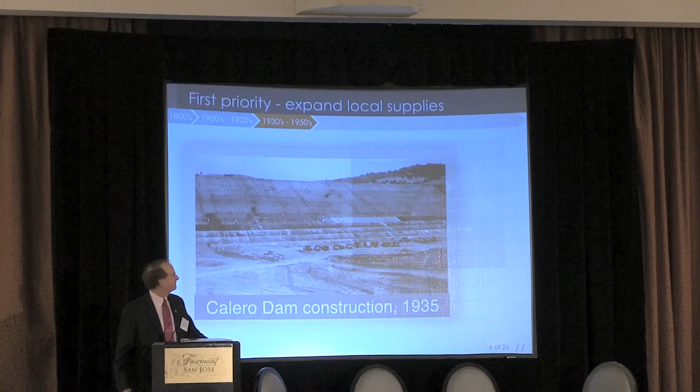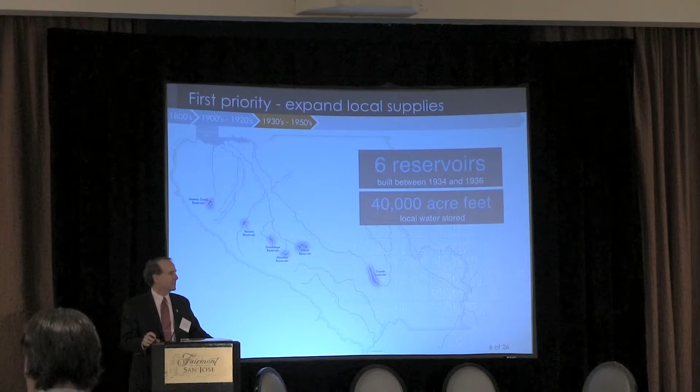In 1935, construction of Calero Dam and the Calero outlet began. In a short period of time, which we cannot replicate today, about 2 or 3 years, 6 dams were constructed in Santa Clara County, from Stevens Creek in the north to Coyote Reservoir in the south. These reservoirs combined allowed us to store water to replenish the groundwater basin, about 40,000 acre feet.

The important news is that those facilities built in the 1930s are still in use today, provided we get rainfall, allowing us to continue to manage the water supply for Santa Clara County. Additional reservoirs were built in the 1950s, Anderson and Lexington. But what became apparent was that the local supplies in our county could not meet the needs for water.

What you see illustrated there is a commercial, an advertisement by the San Jose Chamber of Commerce in 1946. It could have been at a function at the Fairmont, for all I know, where they were touting this important region, Santa Clara County.

The poster read, 'I see a market of 40 million people with Santa Clara County as the hub.' Now, 40 million wasn't going to be the population of Santa Clara County, it was the whole west coast of the United States. But the realization was, given the features of Santa Clara County, this could be the hub for commerce. What visionaries they really were, because today Santa Clara County is the hub not only for the west coast, but the United States in terms of high-tech and innovation.

That also illustrates the growth of the population in our region. We went from an agricultural area with orchards to a thriving manufacturing region. You see what happened in the ensuing time, the population growth from the 1940s, believe it or not, the population of Santa Clara County was under 200,000. Imagine what it was like then, and then you see the burgeoning growth that occurred post-World War II boom, and the need for continuing to manage our supplies.

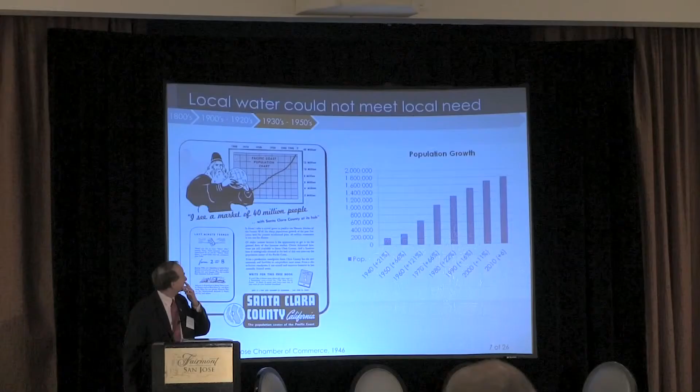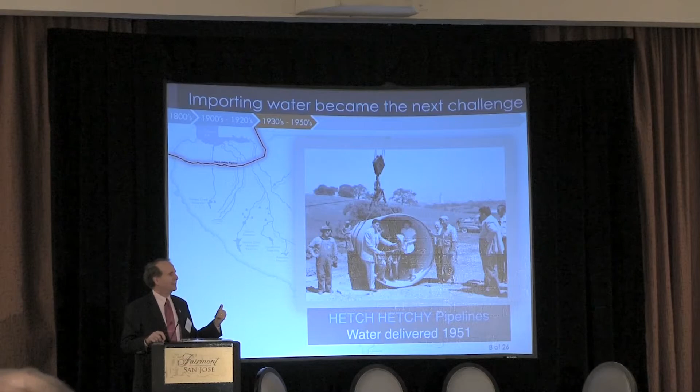What was the solution at that time? This photo shows the need to bring imported water, generated outside our region, into Santa Clara County. The first such source of imported water was the Hetch-Hetchy system from the City and County of San Francisco. Here you see a photo of the construction that was occurring. No, they weren't going to bring cattle through the pipeline, they were actually going to bring water. You can see in the background Hoover Tower in Palo Alto. This was the first delivery of imported water into Santa Clara County, started in the 1950s.

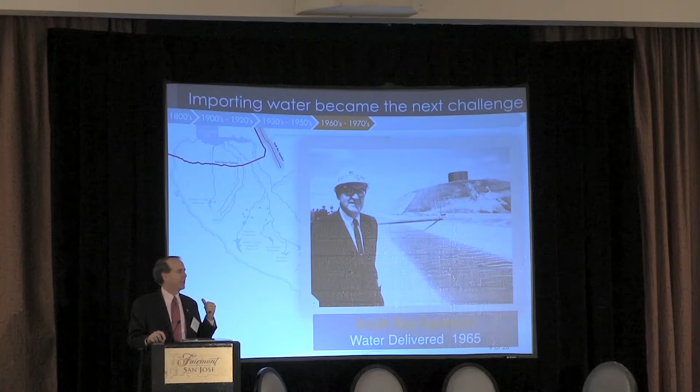Fast forwarding to '65, you see the then-governor, who's the current governor's father, touting the State Water Project, and in 1965 the State Water Project began deliveries into Santa Clara County. What's shown on the slide on the left is the outline of Santa Clara County with the lines depicted: the red line is the Hetch-Hetchy system, and the orange line is the State Water Project entering Santa Clara County in the northern part of our region.

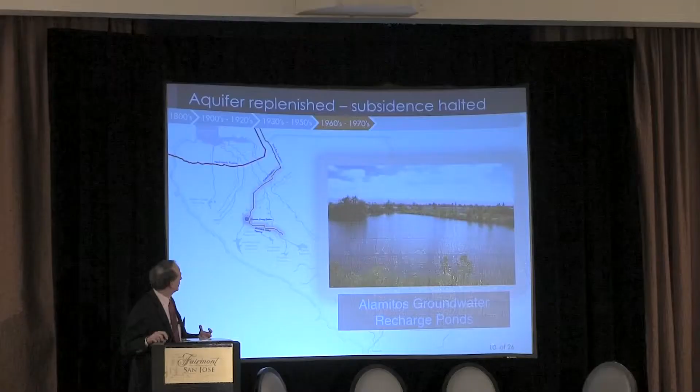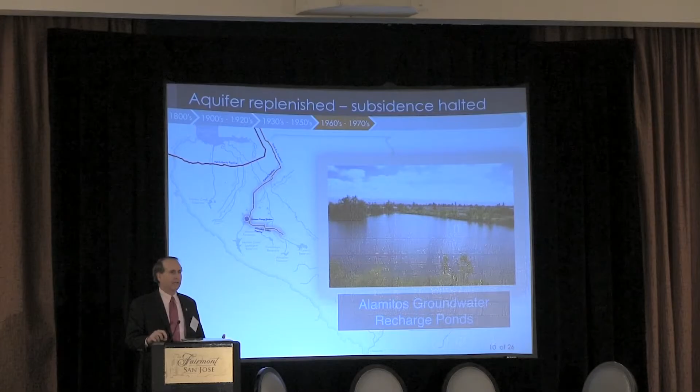An in-county distribution system was starting to be constructed to move that state water through the county. What you see depicted is our central pipeline, which passes not too far from here, bringing state water across the valley floor and over to the west side of Santa Clara County. An important result of bringing imported water was not only providing for water supply, but halting the subsidence that I mentioned earlier, which occurred throughout our region.

We were able to bring in imported water to supplement our local supplies to recharge our groundwater. We also recognized that just recharging our groundwater was not sufficient.

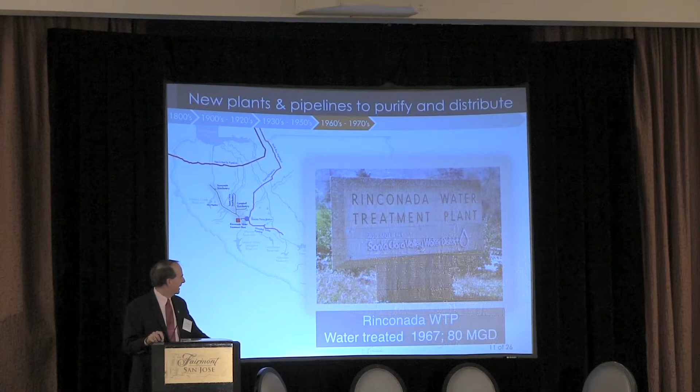We need to allow our customers to rely on surface deliveries of imported water. So we constructed our first large water treatment plant, completed in 1967, that would take imported water, and instead of people pumping from the groundwater, they would take water from our surface treatment plant. This had an 80 million gallon a day capacity.

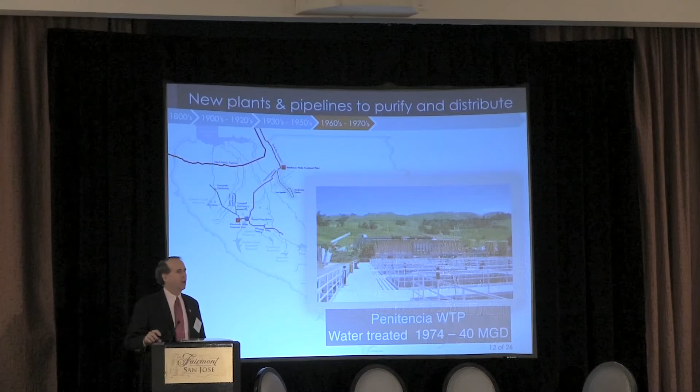In 1974, we constructed our second water treatment plant, Penitencia, on the east side of Santa Clara County, located at the top on that slide. Again, supplementing our imported water with treated water to serve our customers and take some of that burden off the groundwater basin. However, even the imported water from Hetch-Hetchy and the State Water Project were not sufficient to meet our growing needs for water supply.

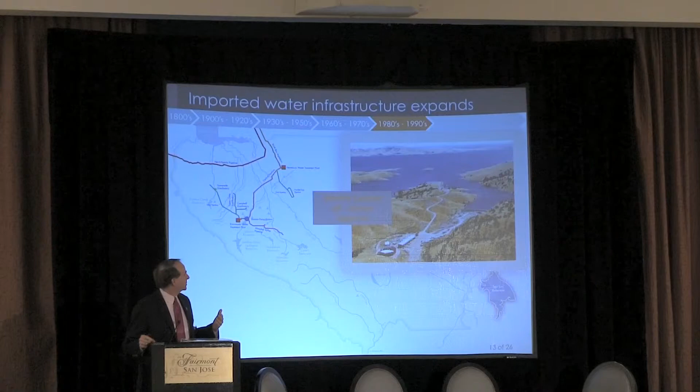What you see here depicted in the 1980s, we started a project to bring water from San Luis Reservoir, located near Los Banos, into Santa Clara County. We had a tunnel project that was completed. You can see they made a breakthrough in 1981 to connect San Luis Reservoir into our water distribution system in Santa Clara County.

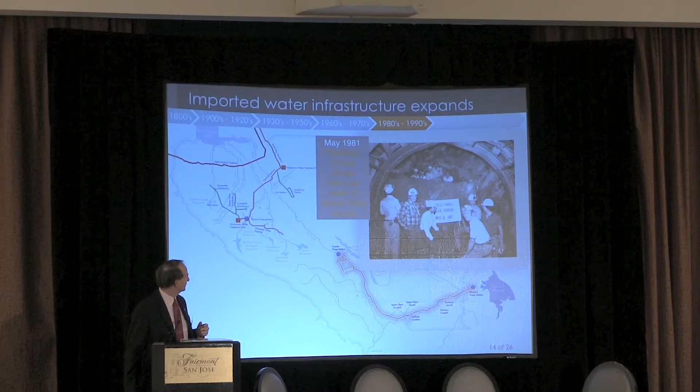That's known as the Central Valley Project San Felipe Division, bringing water from San Luis Reservoir to the base of Anderson Dam. And then we completed our infrastructure by tapping that system into our Almaden Valley and Cross Valley pipeline to bring imported water from San Luis all the way over to Los Gatos to serve our treatment plants.

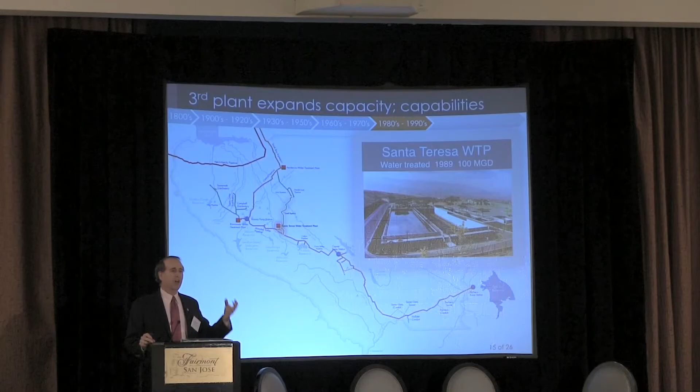We also constructed our third water treatment plant in 1989, the Santa Teresa plant, 100 million gallons a day, to also use that imported water to meet the growing needs for water supply.

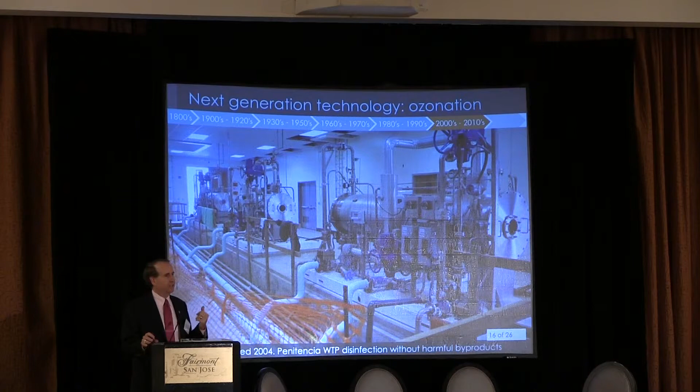And then, moving forward in time, we recognized that with new technologies and new demands for treatment, we opted to add ozonation to 2 of our 3 water treatment plants. You see some of that configuration there for taste and odor, and also to improve the overall treatability and quality of our treated drinking water.

To also supplement our abilities to make sure we're delivering high quality water, in 2008 we completed a state-of-the-art laboratory that allows us to test our water quality. Over 170,000 tests are done annually through that lab to make sure our water meets or exceeds the drinking water standards, and also provides for what the customer demands for water are.

As Beau alluded to, just this past July, we brought online our 4th water treatment plant. It's a water purification facility. It takes effluent from the adjoining wastewater treatment plant, treats it to high quality for use to improve the quality of non-potable water, but has great potential for us to use the same technology to recharge our groundwater basin or even provide direct water supply from wastewater in our future.

So where we are now, our history, we've gone from an agricultural region to now a booming area with close to 2 million people. A number of cities in our county, we have a number of water purveyors that we sell water to who also pump from the groundwater basin. A number of private well owners also pump. We also have agricultural interests in the South County that still rely upon the groundwater basin to meet their water supply needs.

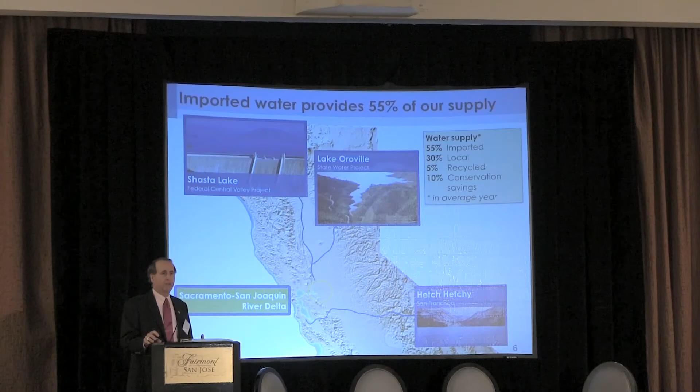So what it looks like today from the water picture, here's a map that shows some of those imported water sources that come into Santa Clara County. Today, we rely on imported water to meet over half our water supplies in a normal year. In dry years, we need more water from imported supplies. About 30% is locally derived, which we're fortunate to have those local reservoirs that allow us to store local runoff when we have it. Currently, 5% of our needs are met by recycled water. And because of a number of aggressive programs we've instituted over the years, 10% of our needs today are met through conservation.

So it's a tribute to our communities that really respond so well over time to the need for us to be wiser with our use of water.

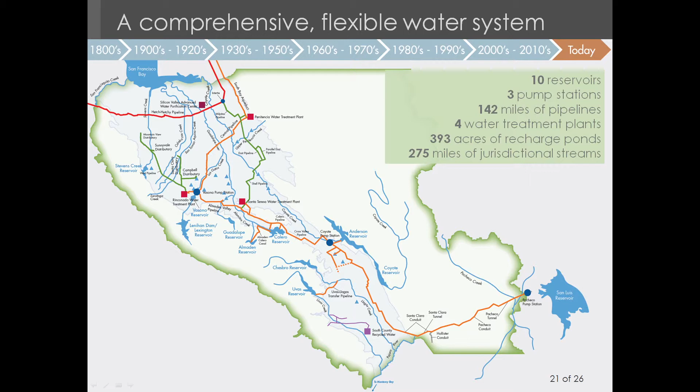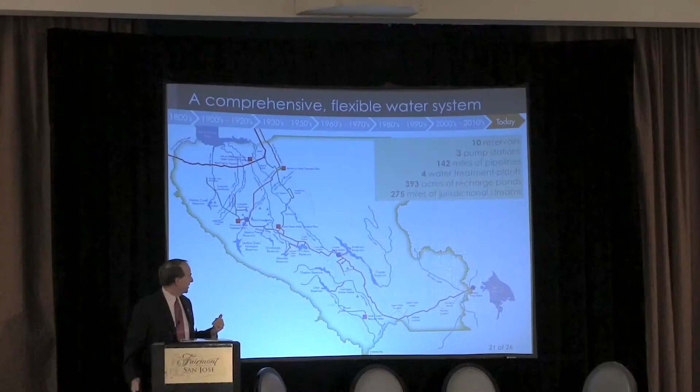Fast forwarding now, here's that same map we saw earlier with the native population back in the pre-1920s. It's a map that doesn't show the freeway system of Santa Clara County, but shows the water infrastructure managed today by the Santa Clara Valley Water District. See some of the statistics: over 140 miles of large diameter pipe, anywhere from 30 inches to close to 100 inches in diameter, 4 water treatment plants, and close to 400 acres of recharge ponds. When we have the water, we want to recharge our groundwater basin. So that's the picture of our county today from a water perspective.

Over time, we went from the Valley of Heart's Delight to Silicon Valley. We were very proud of that transition, although some of us wish it would have been nice to still have the Valley of Heart's Delight. But it's a delight for many to live here, to thrive on the economy generated by the high-tech industry that, underlying it all, relies on an adequate supply of water to make that industry go.

Another way of looking at our history is through this graph, for the engineers in the room. There are 3 main lines: the top line is the land elevation, showing the subsidence that occurred in the county, which the slide depicts as about 13 feet between 1915 and 1970. The green line shows the population growth of the region. And very importantly, the blue line shows the actual depth of water in an index well in San Jose, not too far from here, over time. What you see depicted is really the history of water development in our county.

In those pre-1920s, you see the groundwater table dropping. Concerns about subsidence and the lack of water in wells led to the formation of the water district and the construction of those dams and reservoirs, and you see the rebound of the groundwater table as a result of that.

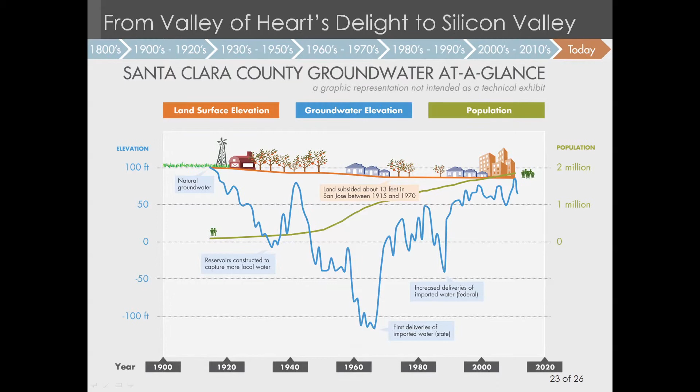Then you see the post-World War II boom, with the continuing dropping of that groundwater table until the 1960s, coinciding with the first deliveries in our county and the importation of water through the state water project. Then in the late 1980s, the groundwater table began to drop once again. We then brought in the Central Valley Project waters into our county, and you see the result today. During this current drought period, you see the basin continue to reverse course, going down as we recognize we need to provide a continuation of adequate supplies of water for our region.

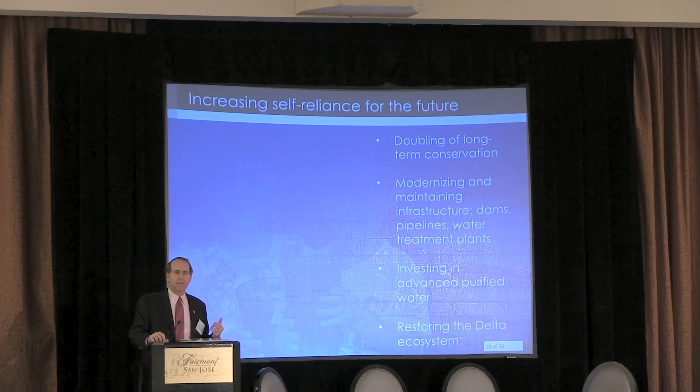So as we look forward, and many speakers today will talk about this, what's our future? We know we need to double the conservation savings we rely on today. As I mentioned, 10% of our supply today is made up by conservation, and we want to double that in the next 20 years. We want to maintain and modernize our infrastructure, our dams, our treatment plants. Katherine Oven and staff will talk more about that later this morning.

Investing in advanced purified water—we have the example of the plant that's online today. We see great promise in expanding the use of recycled water in a purified form to recharge and provide a potable water source for our region. And then restoring the Delta ecosystem, we'll talk about that later too. The reliance on water through the Delta still remains a challenge for us to rely upon today.

So we talk about those that built it for us. What you saw, the system that's been built by the men and women, the vendors, the contractors, over the last close to 100 years—they built a system that we rely upon today. Our challenge today is to make sure we can rebuild that system for the next generation that comes after us.

So that's the history. That's Water 101. Don't know if we're going to be tested on it, but that's my remarks for this morning. Thank you.